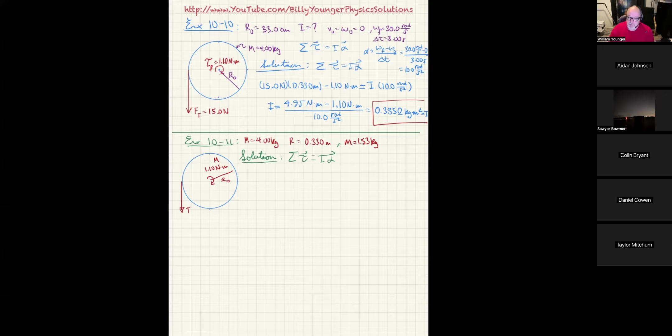Okay, so we have this, but now we also have this other diagram. Now, notice I've sort of made the assumption that counterclockwise rotation is positive. That's what I did previously. I'm going to do the same thing, and to not have to randomly stick negatives in there, like in the equation for rolling without slipping or something like that, you try to make all that consistent. So, what I'm going to do is draw an additional mass which shall be this little quantity right here.

That's m equals 1.53 kilograms. And we have acting on that in the positive y direction a weight W equals 15.0 newtons. But we also have acting on that in the opposite direction the same tension that we had above. So from this free body diagram, the circular one, from that, we have

T times R0, which is 0.330 meters, minus 1.10 newton meters. That's your total torque. And that is equal to I, which we now know is 0.385 kilogram meters squared, times alpha. And I'm going to call this equation 1.

Now, we also have a free body diagram for the other body. So this is the summation of forces in the y direction equals mass times acceleration in the y direction. And in this case, what we get is 15.0 newtons minus T is equal to 1.53 kilograms times a. I'm going to call that equation 2.

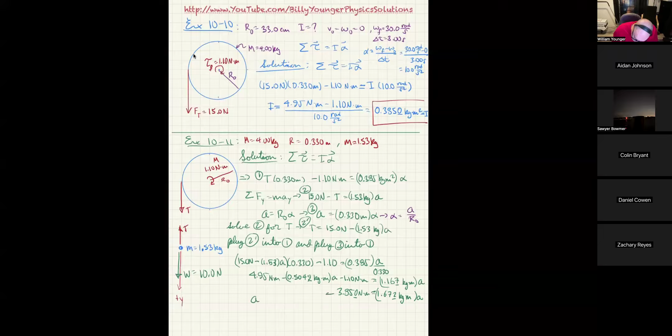times A is equal to, now 4.95 minus 1.1 gives me 3.85, just like it did before. And that's newton meters. And we can see that A, therefore, is equal to 3.85 divided by 1.672, and that gives me 2.303 meters per second squared as the acceleration. That's the linear acceleration. And that's exactly what the book has.

And then we can also use A is equal to R times alpha to get the alpha. So alpha is equal to A over R0, which is 2.303 meters per second squared divided by 0.330 meters. So the alpha is going to be 6.98, or 6.978. And notice that turns out to be just radians per second per second. And that also agrees with the answer the book has.

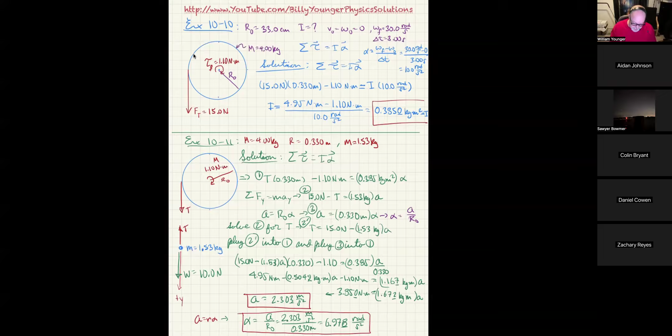Anybody have any questions on that one? Your book is calling it 6.98. That's what mine rounds to as well. No questions on that? All right, we'll keep chugging along then. That's 10-11. We're going to do 10-12 now. So example 10-12. Oops.

And this one says a uniform rod of mass M and length script L can pivot freely, we ignore friction, about a hinge pin attached to the case of a large machine, as in figure 10-24. The rod is held horizontally and then released. At the moment of release, when you are no longer exerting a force holding it up, determine A, the angular acceleration of the rod, and B, the linear acceleration of the tip of the rod. Assume the force of gravity acts at the center of mass of the rod as shown.

And that's the general rule, by the way. As we start applying Newton's laws of motion to physical objects, since we're actually talking about torque now, the objects are no longer point particles. They have an end, the left end, the right end, a top, a bottom, and the point of application of the force is just as important as what the force is.

So when you need to find out the point of application for the weight or the gravity, that's acting at its center of mass. So that's just something we always do. Let me go ahead and draw a little figure to represent the problem we're trying to solve.

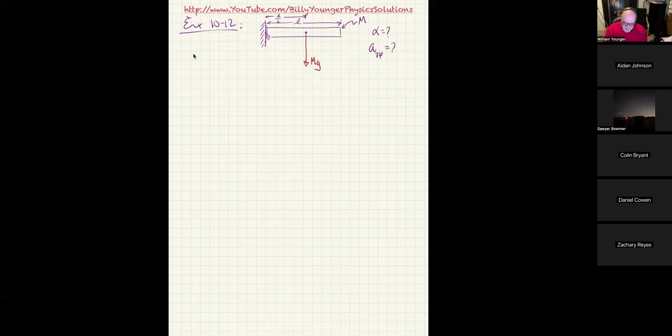Okay. What we're asked to find is the angular acceleration. We want alpha equals question mark, but we also want a at the tip, I shouldn't say final, is equal to question mark. This is another case where we can use a coordinate system whose axis of rotation is right through that hinge. And since it's affixed to a wall or a machine or something, it's not an actual accelerating reference frame.

The direction's fixed. So all the stuff that's necessary to apply Newton's second law in torque form is valid. So we can use that. So we're going to use the summation of the torques is equal to I times alpha. And you can see that the lever arm vector really just points from here to the point of application of the force. Now, there's a slight difference.

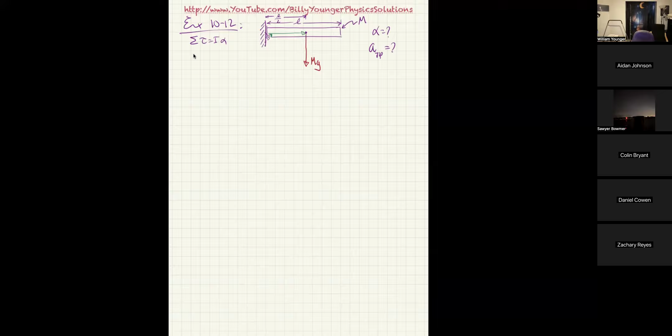You can see this little difference right here, this itty bitty bit of green that I'm drawing right there. We're ignoring that. We can pretty much assume that maybe it's acting right along here and then the force is acting right along here. I just wanted to point out that I'm sort of ignoring that little discrepancy because I can, and it's not that big of a deal.

Okay. But the main thing that we're seeing is that the lever arm vector and the force are acting at 90 degrees. So again, torque is just force times lever arm. So for this case, I get Mg times L over 2 is equal to the moment of inertia of a rod rotating about its end. We derived that last time, and what we found was a rod rotating about its end, if it's uniformly distributed mass, has a moment of inertia 1/3 ML squared. So I'm going to put in that 1/3 ML squared for I, and then that times alpha.

Okay. So what we can see from this is one of these L's can cancel out, both of these masses can cancel out, and what we see is alpha is going to be equal to 3 halves g over L. So that's the angular acceleration we've got. Anybody have any questions on that part?

Now, if we also apply a is equal to R times alpha, in this case, the radius to the tip is L, so a tip is equal to L times alpha. So that's all I need to do to find the acceleration of the tip. You can see the L in the denominator of alpha is going to cancel out with the L that I have here. So this is going to have to be 3 halves g, and that's the total acceleration of this.

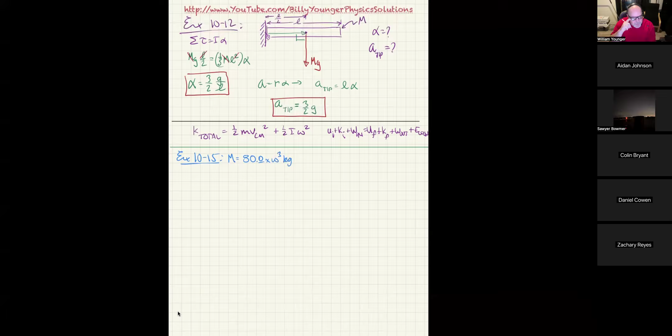So, what they've given us here is the mass is equal to 80 times 10 to the third kilograms. Notice all the other figures they give us only have like 2 sig figs, so I figured there's no reason in trying to say this thing actually has 5 sig figs, so I just called it that way. The diameter, which is twice the radius, is 10.0 underbar meters. Again, making sure I have the 2 sig figs. And we have an omega zero equal to zero, but omega final is equal to 100 revolutions per minute.

So that's what we're looking at. What we're trying to figure out is if I actually spun this thing up at the full speed of 100 revolutions per minute, how much energy would that entail? And just to see if that's a decent amount of energy or whatever. So the formula we're looking for here is K is equal to 1/2 I omega squared. It's a cylinder, so I is equal to 1/2 mr squared, like that.

So now we can go ahead and say K total is equal to 1/2. Now we've got to put 1/2 mr squared and then times omega squared. In order to do that, I really need omega to be in units of radians per second. So omega is equal to 100 revolutions per minute. That means one revolution on the bottom can cancel out the revolution on the top, and that'd be 2 pi radians in the numerator.

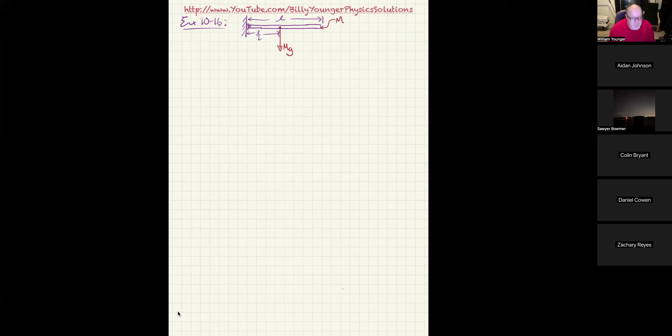So this rod has a length L like this. It has a center of mass that is over a distance L over 2 like this. It's going to have acting on it a weight mg like that. So we're going to imagine that the rod has a mass m, a length L, so on and so forth. And as it spins, it's going to spin in such a way that it ends up being in this position at the final end. And you can see that now from here to here is L over 2.

So if we let this position be y equals 0, then we can use our conservation of energy techniques, and they are U initial plus K initial plus work in is equal to U final plus K final plus work out plus E loss.

Again, we're not dealing with any friction here, so I don't have to worry about work done against friction. I'm not compressing any springs, so basically we can go on the assumption that E loss, work out, and work in is 0. Not only that, we can go on the assumption that the potential energy at the end is 0, so I'm going to put that as 0. And the object starts from rest, so we can say the initial kinetic energy is 0. That leaves us with just the following.

We're going to say M times G times L over 2 is the actual potential energy initially. Remember, potential energy is just m times g times y, and you can put the zero of the y anywhere you want. I put the zero of the y L over 2 distance below the horizontal beam because that's where the center of mass will be at the end.

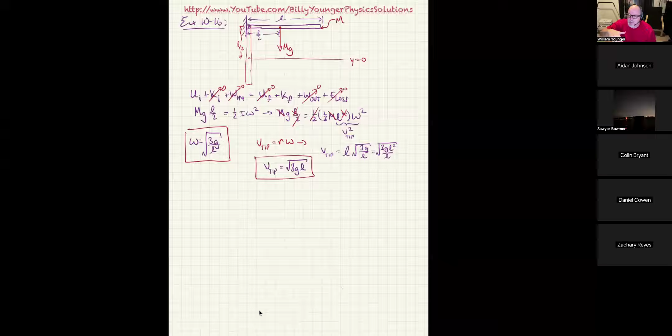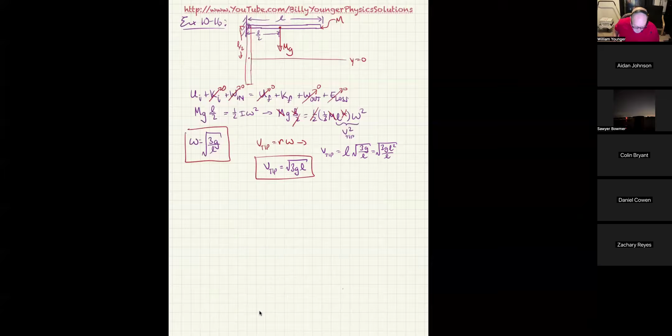Notice if you dropped an object and just allowed it to fall straight down, we know from kinematics as well as from conservation of energy that its velocity after falling a height of L over 2 would just be the square root of 2g times L over 2, which would just be gL. In this case, we actually got 3gL, but it's going in an entirely different direction and entirely different motion. But anyways, hopefully that points out to you how much different rotational motion is than translational motion.

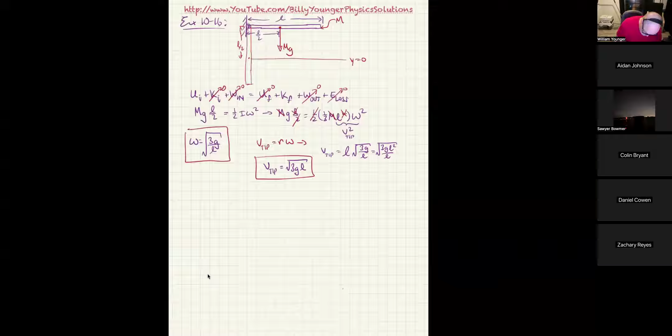Let's go on to our next example where we're now going to apply Newton's laws of motion. And in so doing, we're going to use it to figure out things like what would be the speed of a sphere rolling down an incline. We're going to work that out with conservation of energy first, though. So let me do that. I'm going to draw a line here. And this is going to be example 10-17.

Somebody just came in. Let's let them in.

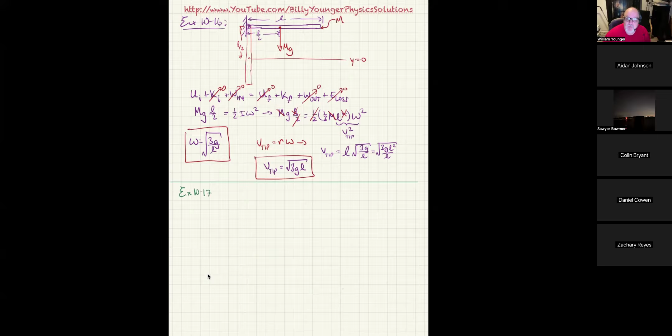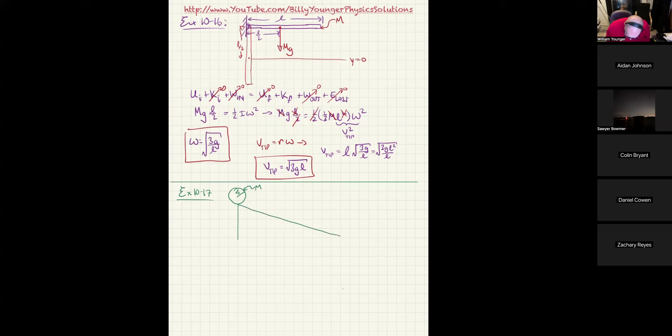Okay. So what we're looking at here is a uniform solid sphere. It's got a radius R0 and a mass big M. It's sitting on top of an inclined plane, and the height is h. And the angle right here is theta. That might come in handy later. The main thing is we're going to use conservation of energy, and what we want to figure out is what will be the speed of the center of mass at the bottom? So down here, it has a V center of mass, and that's what we want to work on.

So what I'm going to do is again take my U initial plus K initial plus work in is equal to U final plus K final plus work out plus E loss.

We're going to have a lot of reductions like we always do. The initial potential energy is going to be M times G times H plus R0. The initial kinetic energy is going to be 0. The work in is going to be 0. The work out is going to be 0. The E loss is going to be 0. In this case, the potential energy is not going to be 0 at the final end.

It's going to be mg times R0. And then we're going to have plus. In this case, we have translational motion. The center of mass is moving, but we also have rotational motion. So we have to add both terms. This is going to be 1/2 m v center of mass squared plus 1/2 I omega squared, like that. We do know it's a sphere, so I is equal to 2/5 mr squared, and that'd be R0.

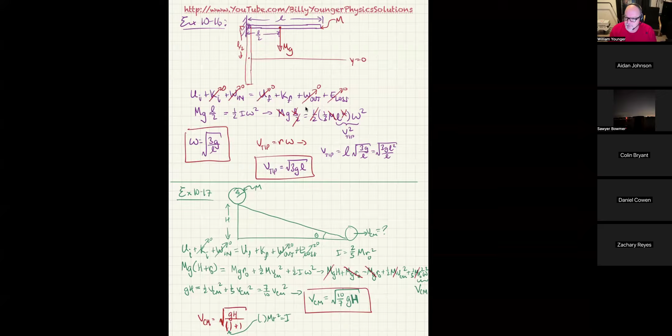The main thing is, like I said, that conceptual example, 10.18. Whatever the multiplier is in front of mr squared, the bigger that is, the smaller the velocity will be, which means the later it'll get to the bottom. So the frictionless block sliding down the incline will get there first, then the sphere, then the solid cylinder, then the empty can, and then the hoop. So that's the main thing. I'm going to skip this and move on to example 10.19.

And this is really the last one I'm planning on doing anyways. It says analyze the rolling sphere from example 10-17 in terms of forces and torques and determine the velocity VCM of the sphere's center of mass at the base of the incline and the magnitude of the friction force. So we want VCM equals question mark, and I'll put an F on that for final. And we also want to know the friction force, question mark.

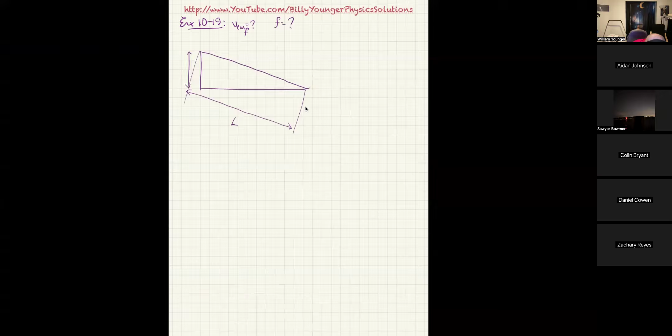Okay. Now, what we have here is the same sort of inclined plane. And what I'm going to say is this distance right here, parallel to the incline, is going to be L. I'm going to say this distance from here to here is H, and this angle is theta. And that's because I know what's going to happen, and I'm going to need to find a symbol for the whole length down there, because what I have to do is use a kinematic equation to figure out, once I have the acceleration, exactly how fast will the ball be going by the time it gets to the end of the incline.

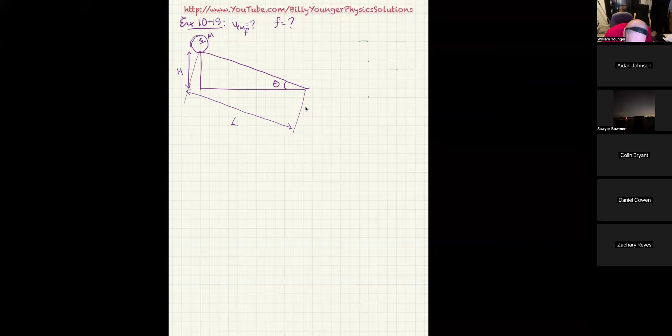So we're starting it right here, like that. It still has a radius r0 and so on and so forth like we had before. It still has a mass m. What I want to do though is I now need to draw the sphere so we can have a free body diagram of this that is helpful. So I got to do a free body diagram for this. To that end, I'm going to draw a circle right here roughly. Okay. The inclined plane is going to be going by like this, something like that. And I moved it down a little bit.

Now, we're going to set up a coordinate system that looks like it should be roughly, that's my x-axis going parallel to the incline. Something like that. That looks fairly parallel. And this will be my y-axis. That's my x-axis. Now, what we have here is the weight, mg, acting downward. That can be broken up, because this angle right here is theta. This angle right here is also going to be theta. Hopefully I'll remember that from previously.

And this side right here is going to be the force parallel to the incline. This one, on the other hand, is going to be mg cosine theta, and this one's going to be mg sine theta. Now, in addition to that, we're going to have a friction force, which acts right here along this direction. And we're also going to have a normal force that goes that way. So now I'm going to say the summation of the forces in the x direction equals mass times acceleration in the x direction. And from that, I'm going to get mg sine theta minus the friction force is equal to m times a. I'm going to call that equation 1.

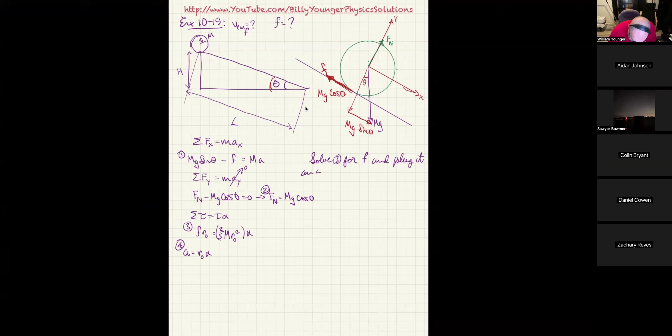So in this case, all I'm going to have is the friction force, which is acting perpendicular to the radial line. So that's the friction force times R0 is equal to the moment of inertia, which is a sphere. So that'd be 2/5 mR0 squared times alpha, like that. That's going to be equation 3. And if we assume rolling without slipping, then we also have a is equal to R0 times alpha, and that'll be equation 4. So what I can do is I'm going to solve 3 for F and plug it and 4 into equation 1.

So you can see from equation 3, this R is going to cancel out with that R, and we're basically just going to get F is equal to 2/5 mR0 alpha. So I can just put that in, and that's going to be mg sine theta minus 2/5 mR0 alpha is equal to mA.

Now, I'd like to solve for A first, so I'm going to go ahead and replace the R0 alpha with just A. So now we can see that mg sine theta minus 2/5 mA is equal to mA. Now you can see that the masses are all canceling out, and what we have is g sine theta is equal to 5/5 plus 2/5, which is 7/5 mA.

So A is actually going to be equal to, oh, the mass was supposed to cancel out. Sorry, I left that out. So that's supposed to be 7/5 A. So A is supposed to be equal to 5/7 g sine theta, which isn't necessarily that helpful yet, but we're supposed to ultimately find what the center of mass velocity is. And in order to do that, I need to know what the acceleration will be.

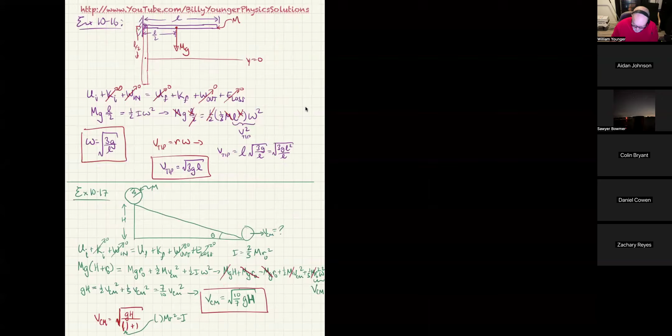This is one of the first things that made me fall in love with physics. In an entirely different scenario, notice we worked this all with energy methods and we got this value for the final velocity. Entirely different way, we got exactly the same velocity. Isn't that awesome? Now, the last part of this is now that we have the alpha or the A, we can actually figure out what the friction force is.

So the friction force is going to be 2/5 m R0 alpha, which is 2/5 m times A, which is 2/5 m times 5/7 gh over L. Now you can see that the fives cancel out and I get a friction force equal to 2/7 mg times h over L, which is just the same thing as sine theta. So that's our friction force. Anybody have any questions on that one?

All right, so we managed to work this out and we discovered that in fact we got exactly the same results. And we also found the friction that's exactly what the book said as well. So that all looks good. The rest is just, quote unquote, more advanced examples. They're really good. I don't think there's any need for us to cover them. You can certainly look them over, and it's not like I'm saying you're allowed to omit this section. I'm just saying I've done what I believe is an ample number of example problems for this chapter.

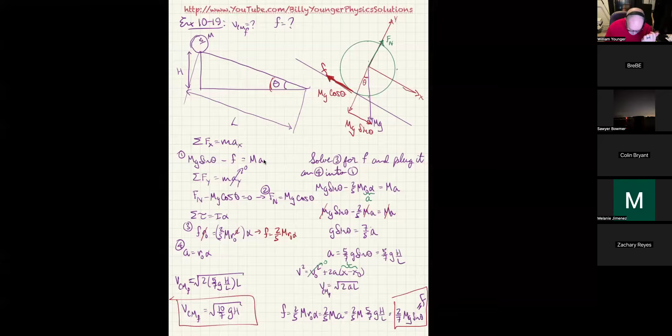In that case, I was trying to do a problem for Excel yesterday to find the rotational acceleration of a bar that was pushed on the east side southward by 200 newtons and, yeah, one side was being pushed up by 200, the other side was being pushed down by 200 newtons. I was trying to find out what the rotational acceleration was.

I gotcha. So you had something, you said it was a bar. Yeah. So you can say maybe you had a rod like this, and you had a force of like 200 newtons. Yeah, the west side was being pushed up by 200, the east side was down by 200, and it was 5 kilograms and 2 meters long. I thought I had it right, but when I put in the answer, it said it was wrong, so I didn't know where I went wrong.

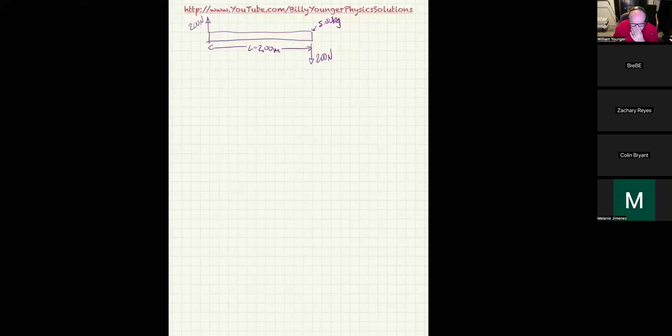Gotcha. And they said the length is 2 meters, and they're asking you for the angular acceleration? It's angular acceleration. Okay. So what we have here is the summation of the torques is equal to I times alpha. In this case, we're going to assume it's a uniform rod, so everything's going to rotate about the center of mass like that. So we get 200 newtons times 1.00 meters.

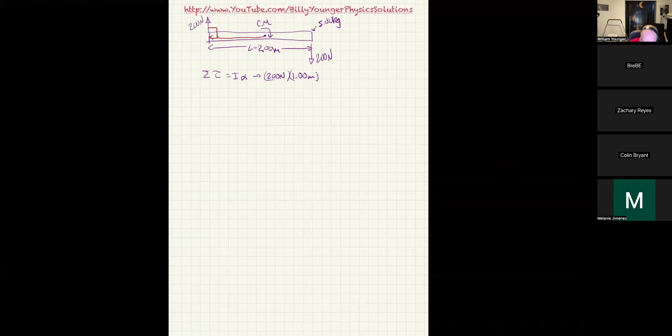Notice that force is actually perpendicular to that lever arm. I'm sort of ignoring the vertical thickness of the rod again. Similarly, we have a lever arm over here, but again, that's at a 90-degree angle. Both of these are tending to produce a clockwise rotation, which for the heck of it, I'm just calling positive. So now I've got plus 200 newtons times 1.00 meters.

And then all of this is equal to, now this part could have been what you did, but when you rotate this about the center of mass, it's 1/12 ml squared. Okay, yeah, I definitely didn't have that part there. I couldn't find anything about 1/12, so that definitely wasn't something I could. That was what I derived in class last time. We did it once with the parallel axis theorem, but we also did it with the integration techniques. I was afraid that might have been what was happening.

So I'll just say right here, this is going to equal 1/12 times the mass, which is 5.00 kilograms, times the length, which is 2.00 meters squared, and then all of this is times alpha. Actually, I don't even need parentheses there. So 200 plus 200, this is 400 newton meters is equal to,

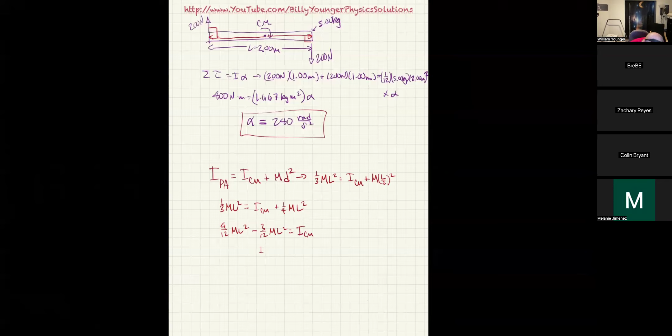But we know the axes of rotation differ by a distance of L over 2. So this is going to be m(L/2) squared. So we get 1/3 mL squared equals I about the center of mass plus 1/4 mL squared. Now you can see that this would be 4/12 mL squared minus 3/12 mL squared is equal to I center of mass, and therefore you get 1/12 mL squared is equal to I center of mass. Does that make sense?

Yes. I'm doing my best to follow along. Is it always that for a thin rod, it's always the 1/12th, or is it just for this in particular? No, it's just for a thin rod, and by thin we mean one, it's uniformly distributed. So if you cut out a 1 centimeter segment of this rod and you cut out another random 1 centimeter segment, they better weigh exactly the same. If you have that, then you have uniformly distributed mass.

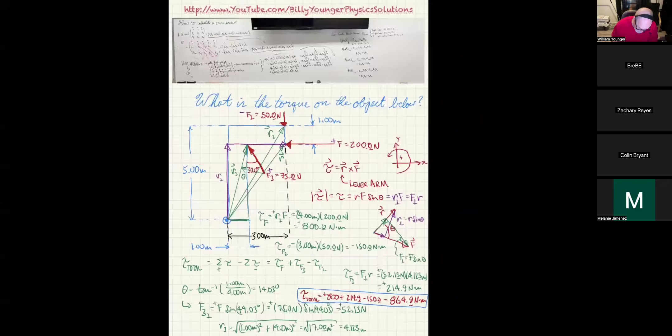And the other thing is the radius has to be small compared to the length. As long as you have that, then automatically the moment of inertia about the end is 1/3 mL squared, and about the middle is 1/12 mL squared. Okay. All right. Yeah, I think that was why I kept trying to find the moment of inertia yesterday, and a lot of it got complicated when I looked in the book.

Okay. One other thing before I go is one of the answers yesterday, it was essentially asking, what was it? I wrote these down to help me study. Force multiplied by time. I wrote momentum and it told me I was wrong. It was impulse, but isn't impulse and momentum roughly the same thing? It is, but there's a little nuance. The impulse is the change in momentum. So if you said delta p, they might have accepted that, but if you say momentum, it's not technically

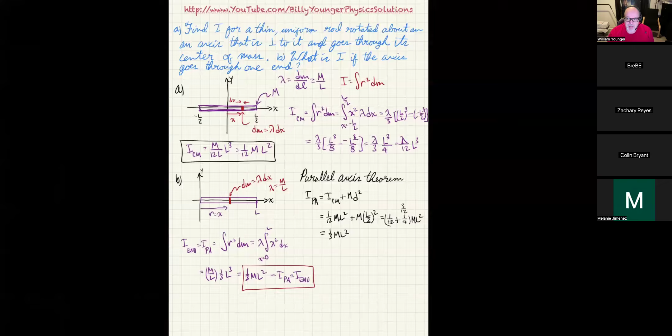correct to say it. The F delta t is just the delta p, and that comes from the idea of basically F is equal to delta p over delta t. At that point, it feels like semantics, but okay. Yeah, it is a little, but conceptually it's an important thing. You don't want to say the impulse is the same as the momentum, because you would come up with a force that would be zero when the momentum is zero, and that's not necessarily the case. All right. Thank you. No problem.

Anybody have any other questions? Well, you folks are free to go. I did correct that practice test, so go ahead and knock that out. At least take it once, even if you got a 60 out of 60 or whatever the number of points were. That's fine, as long as you've got it. I'll make sure that you get 100 for that. But the key point is, I need you to do it so you can get some experience with those other chapters, other than just 9 and 10 that was on there. So please do that.